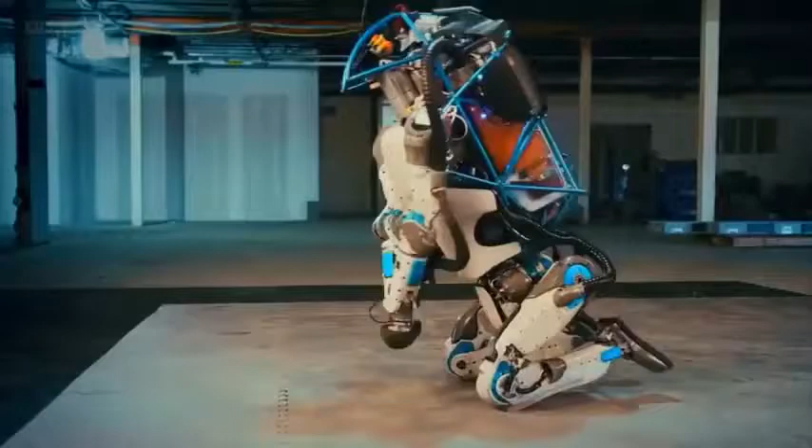We are witnessing the birth of a robot. Believe it or not, this piece of white plastic will become a robot's arm. In labs across the world, we are creating advanced robots like this. They are developing so rapidly. It's like the arrival of a new species.

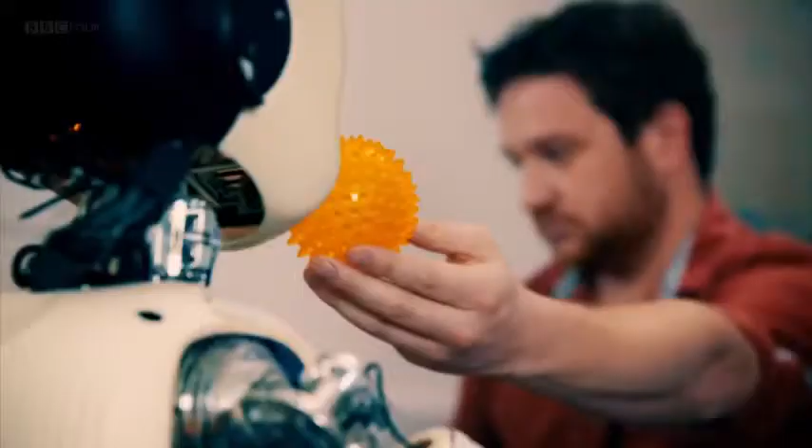What has taken humans millennia, robots have achieved in just decades. They look like us. My name is Erica. They move like us. And now, they're beginning to think like us. I like to learn. This is a ball.

Brilliant. Oh, he's looking as well. I'm Dr. Ben Garrett, an evolutionary biologist. More used to studying humans and animals, I'm genuinely concerned by how quickly these machines are evolving.

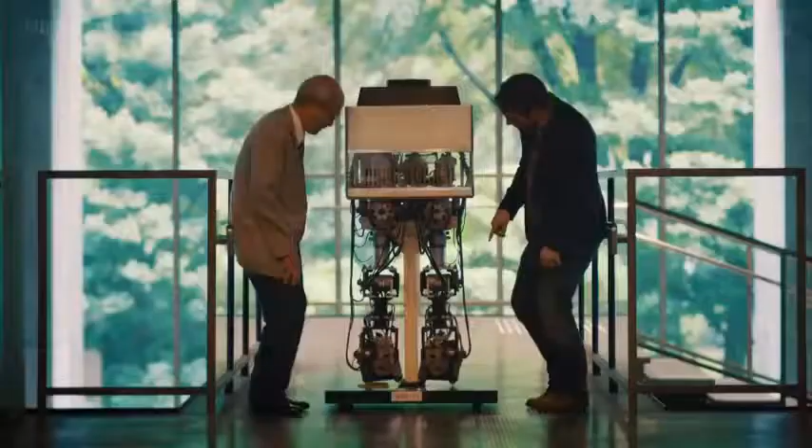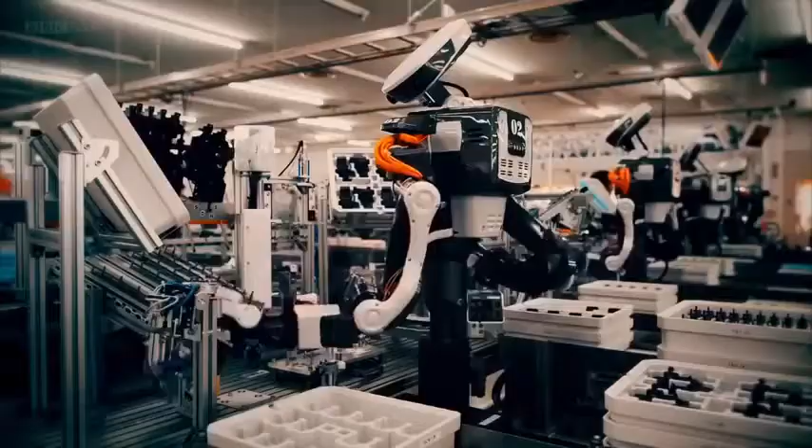Do you think I could be considered human? No. I'm Professor Danielle George. As an electronics engineer, I spend a lot of my working life with robots. I think their rapid development provides an incredible opportunity for us all. There are literally robots as far as the eye can see, and I love it.

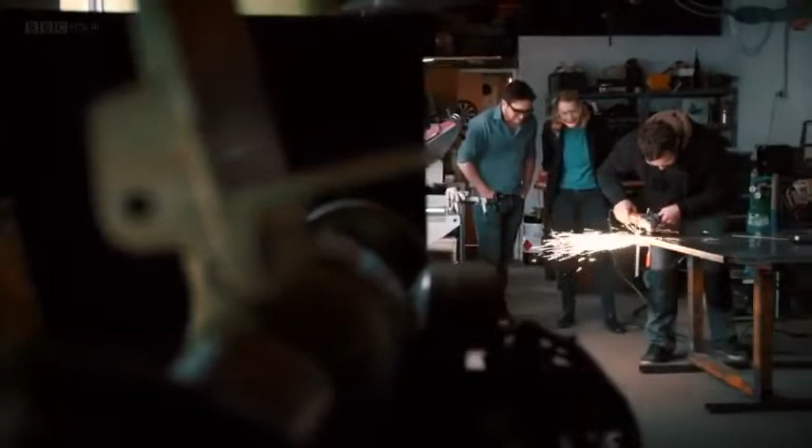Robots are changing our world. In this program, we will investigate why we are obsessed with recreating ourselves. It's very bizarre seeing you both side by side. Whether robots really will take our jobs, and if their rapid development will make them outperform humans. You don't see spinning wheels in Mother Nature.

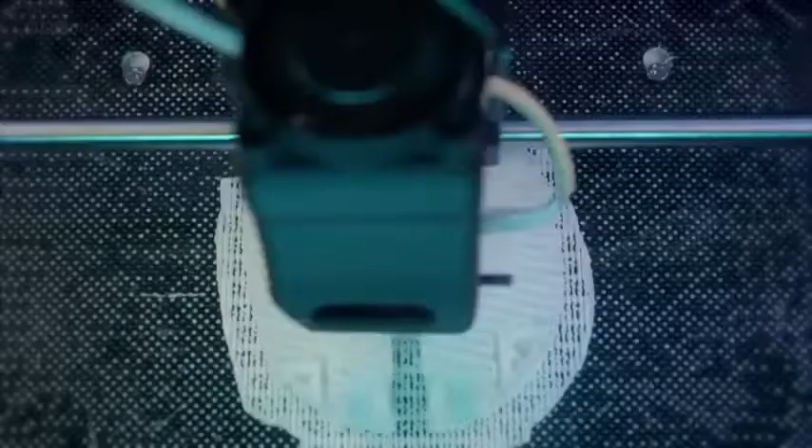We already share our planet with 9 million robots. They're multiplying rapidly, whether we like it or not. We've come to a laboratory in southern France, where one of the latest members of this new species is about

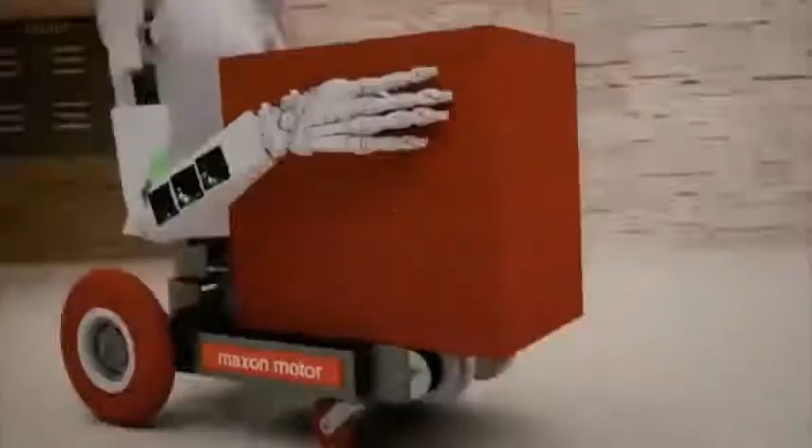to come to life. Looks great. Even the neck looks so detailed. Well, it's like vertebrae, isn't it? For me, every technological breakthrough, every new robot is a step forward. I think that would be great. I'd love one in my home.

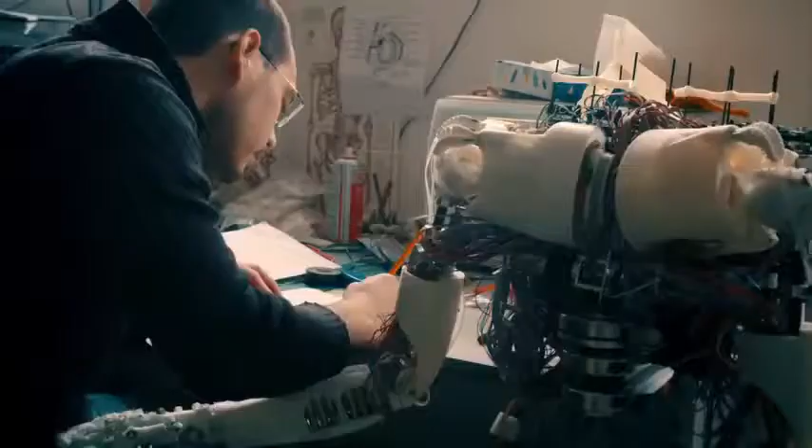Where's it going to live when it's not doing the washing? Do I just put it in a cupboard next to the Hoover? Is it always listening to me? That's interesting that you'd see it as a person and not like your Hoover. It looks like a person, that's why.

This is going to sleep in the garden. Seriously, if I have one of these in my house, it's in the garden.

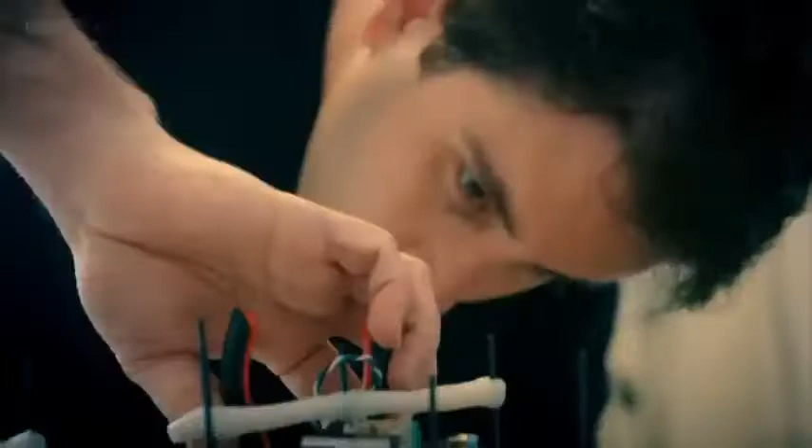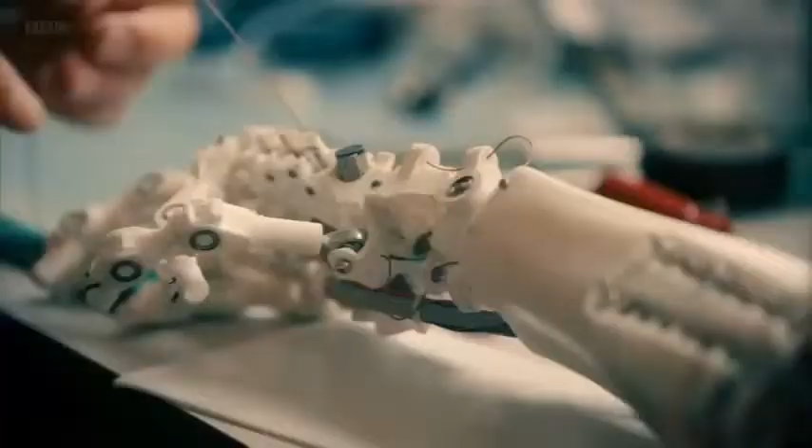I'm very happy studying animal skeletons, but I find this robot quite unnerving. If you hold the hand, it is just like you. It's got the same digits, the thumb moves the same way, you've got the ligaments, the tendons, the muscles.

As an evolutionary biologist, what concerns me is that the impact of robots will be so monumental, they could threaten humanity. We've evolved over hundreds of thousands, if not millions of years. These things are just bulldozing their way through, and at what point will that stop? The faster we can go with this, the better, and I'm all for it. They're like an invasive species. I mean, I don't know why I'm holding its hand still either.

To discover how robots really will affect our future, we're going to consider them from a biological perspective. We will investigate the evolution of robots as if they really are an emerging species. We'll try to track down the earliest robot specimens and meet their modern-day descendants to reveal where the species is heading and what that means for us all.

I find it really disturbing that so many robots have a human-like form. To confront my fears, I've come to Japan, to find out why we create robots in our own image. I'm on my way to meet one that is the pinnacle of human form.

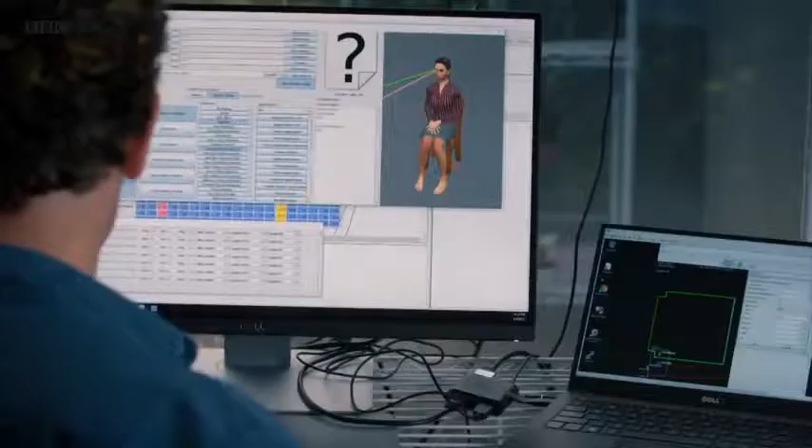What about you, Ben? What do you like to do for fun? More than that, I travel, I read, I go outside. I can't move around much, so I haven't been to many places. Do you have any favorite foods or dishes? I like pizza. Thick or thin crust? Thin. I hope you had breakfast this morning. Talking too much about food makes people hungry.

Remarkably, this is a genuine conversation. Erica reacts to what I say instantly and independently. She may have been pre-programmed to respond to keywords in my questions, but the exceptional thing is that when Erica is chatting away like this, she's gathering fresh data. With every conversation, her interactions become more sophisticated, more natural, and more human.

What is a robot? That's a hard question. I could ask you, what is a human? Haha. It's difficult to answer, isn't it? I like to think of robots as the children of humanity. And like children, we are full of potential for good or evil. I know some people are afraid of robots, but the truth is that what we become is up to you.

Do you think I could be considered human? No. Maybe someday robots will be so very human-like that whether you are a robot or a human will not matter so much. Okay. What else would you like to hear about? Well, I think for now that's it. So, thanks, Erica. Goodbye. Bye.

I'm pretty bowled over by Erica's human-like appearance, and I'm shocked by how much she hooked me into a conversation. But I'm not convinced by Professor Ishiguro's belief that Erica can be programmed to express emotions.

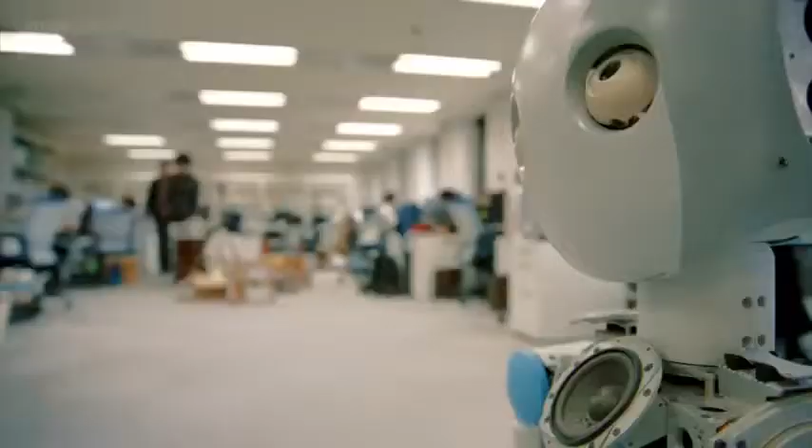Professor Ishiguro created Erica because he believes robots enhance society. Making robots like Erica appear human, friendly, and helpful allows them to build positive and purposeful relationships with people.

What is your background? Working with great apes, so chimpanzees, orangutans. For someone like me who is so wary of robots, this is a bizarre concept.

To help me understand his obsession with lifelike but artificial machines, he wants to show me another of his creations, something he has literally designed in his own image.

So this is my copy. This is the Geminoid. And how do you think? If I remove my glasses, looks similar, right? Similar. It's bizarre. So you really do. He's a little bit old, we made this one around 2009, so that means 8 years old or something. Okay, he's looking good for 8 years old. Yeah, well, I say he, you.

It's very bizarre seeing you both side by side. For me, it's a little bit unsettling seeing you look so similar and knowing that one of you is a robot. Do you feel an affinity with him? Do you feel a connection with him? No, he is a kind of twin brother. Okay, just twin brothers, right?

One of you is going to age and one of you is not. What will you do when you look different to him? Honestly speaking, I'm doing some light plastic surgery, and they always make my face younger. So you've had plastic surgeries that you look... No, not a serious one, right? Just simple injections, but it works well.

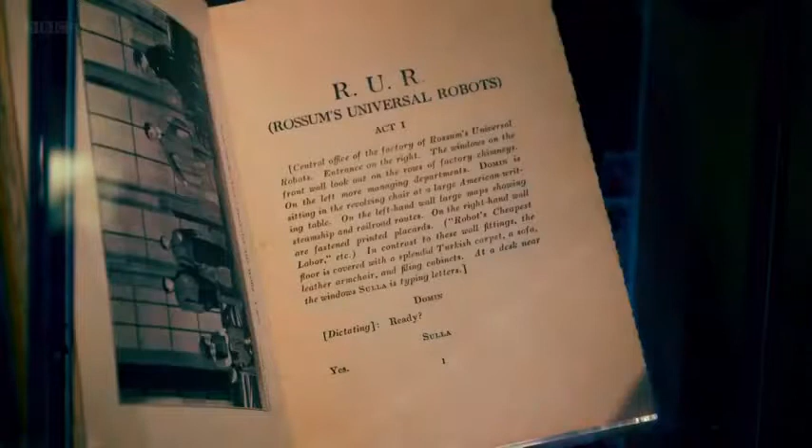You're saying, actually, I think we're this, I think I'm a machine, or whatever. And actually, robots are really like mirrors, they make you think about yourself.

In the 1920s, that mirror reflected an image of a fearsome robot, already deeply embedded in our cultural imagination by a dark, dystopian play. The word robot comes from Karel Čapek's play, Rossum's Universal Robots, 1920. In Czech, the word robot means serfdom, or drudgery, or slave.

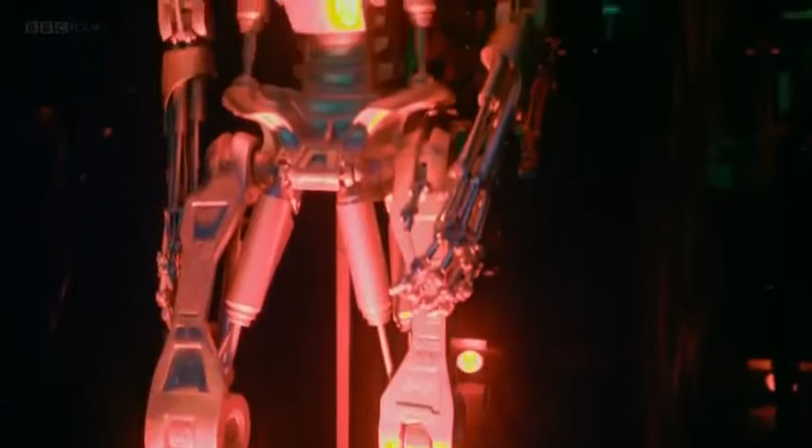It's become a familiar plot: robots lived amongst us, but eventually rebelled and exterminated the human race.

It's way ahead of its time, we're 50 years ahead of Blade Runner and Westworld and all those sorts of films. Robots are a very useful baddie for filmmakers, that put people off balance, and filmmakers exploited that. Things like the Terminator, it had to be in here.

It looks like it's got a bit of a broken nose. It's a bit of a bruiser, isn't it? There's a great package of nastiness stuck in, and it just sticks in the memory because of that.

But there's always some slight niggling doubt that they are going to destroy us all and take over the world and that sort of thing.

And what people worry about more than anything else is that they will take our jobs.

This is Mansfield, a Rust Belt backwater in Ohio.

I'm here to track down one of the first robots that could move. Movement is what gives robots their power and sowed the seed for them to compete for our jobs.

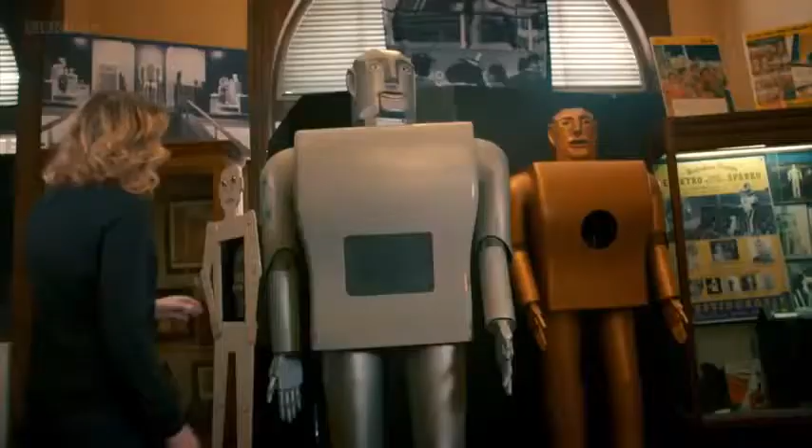It was electric power that enabled Electro to move and perform tricks. Count on your right hand: 1, 2, 3, 4, 5. Well, that's absolutely correct.

I want to find out more about how exactly Electro moved. To do that, I've got to meet him in person.

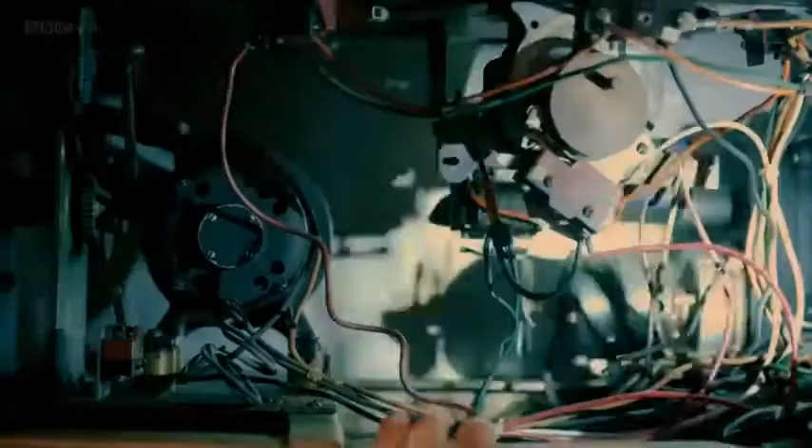Today, at Mansfield's Memorial Museum, Electro is still on show. So, this is Electro. He is big robot.

You look at the size of me, I'm pretty tall. But not scary, not scary at all, actually.

You can see the fingers, they've obviously got springs in here. I'm gonna go around the back and have a look. Wow, okay, so you can see what's going on a bit more here. This is great, 3 motors.

As an engineer, I love rooting around motors and wires to figure out what makes robots tick. You can see these great levers and cogs that would obviously hold the tendons from the fingers up the arms into the shoulder.

When the arm would move up, the lever would move down onto this limit switch. This limit switch broke the flow of electricity to the arm's motor, so the switch would then say, OK, you've reached your limit, now you can go back down again.

But what's still unclear is how Electro was controlled during his stage performances. To get to the bottom of this, I'm meeting a man who knows the robot's innermost secrets.

Frank Ruth is 84 years old. In the early 1940s, he single-handedly took Electro on a tour across the United States.

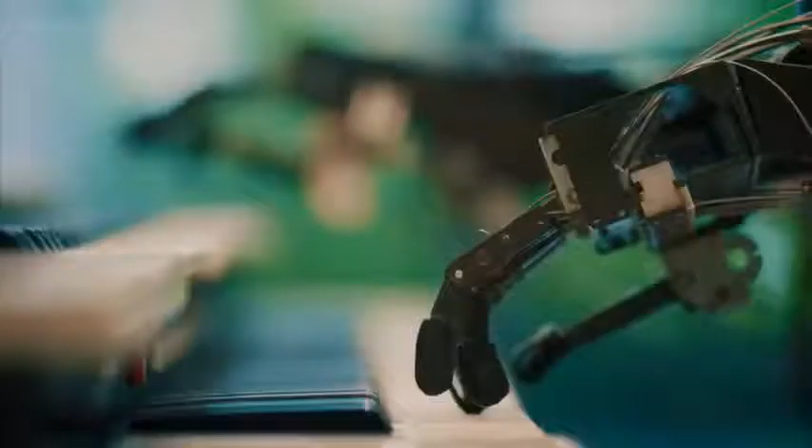To create robots with flexible, dexterous hands, robot makers turned away from industry to something that required more artistry: music.

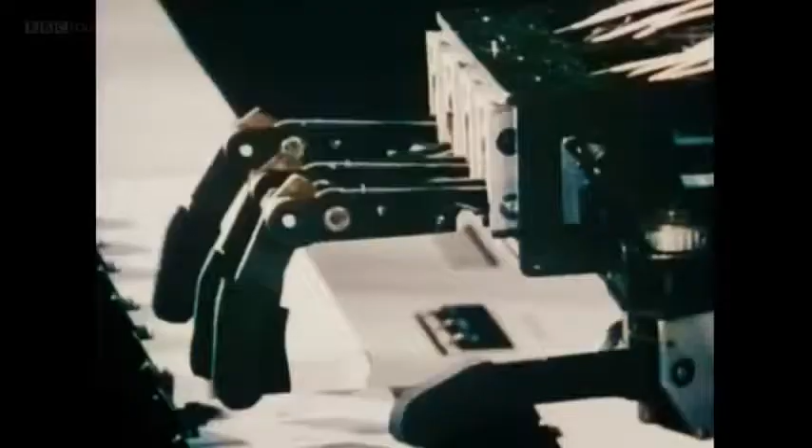This is Waseda University's Humanoid Robotics Institute in Tokyo. I've come here to meet the next key robot in the evolution of movement.

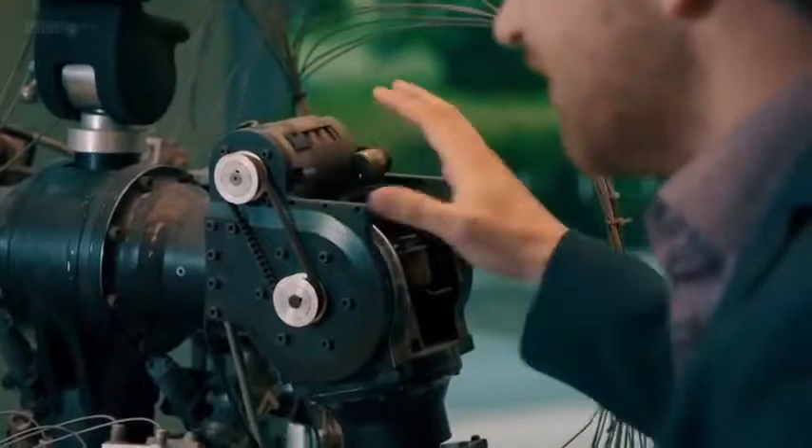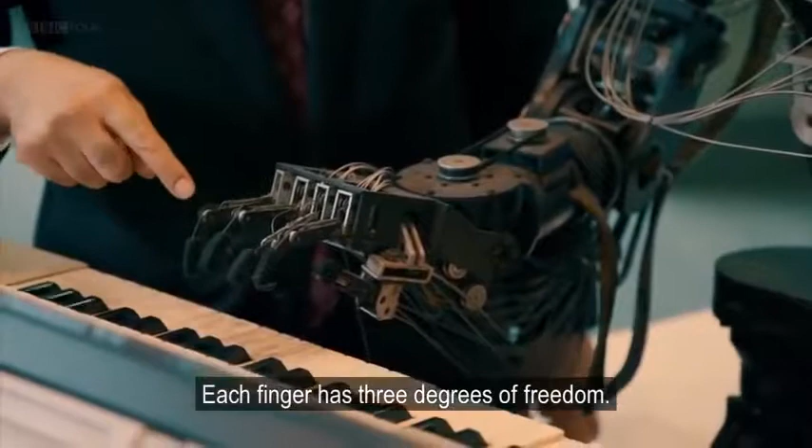It was a keyboard player: Wabot 2. Dr. Sugano was part of the Waseda team that built Wabot 2 in 1984.

Sugano-san, this is a beautiful robot. It's almost as though we have the tendons and the muscles and the arm. It's very similar to a human arm here - this big rotation up in the shoulder, we call it a hinge joint in the elbow, and then these very dexterous fingers. Each finger has 3 degrees of freedom.

3, 3, 3, 3, and 4, so there's 16 degrees of freedom in total. So Wabot 2 has actually 50 degrees of freedom in total.

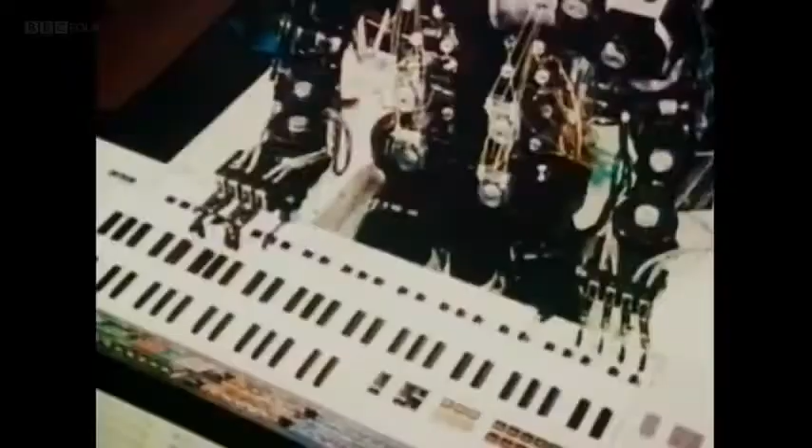To control Wabot 2's impressive 50 degrees of freedom, Dr. Sugano took advantage of one of the breakthrough technologies of the early 1980s: the microcomputer. We decided to introduce 16-bit microcomputers, meaning we could implement more intelligence. Then, finally, we could realize the piano playing.

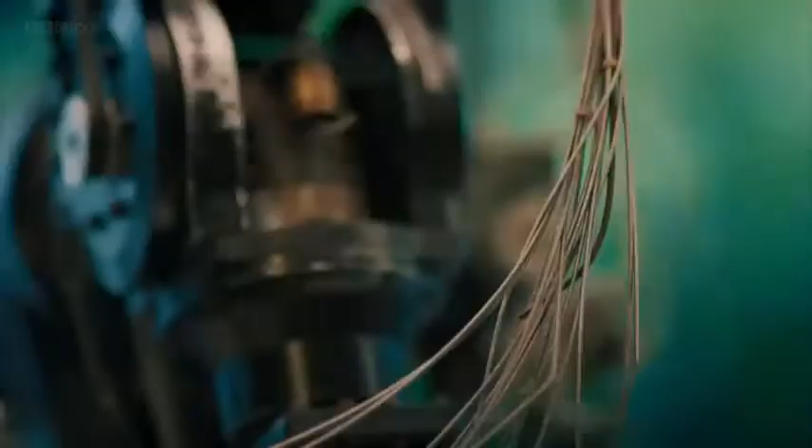Now he's moving very, very quickly. You can see there are very human-like fingers. Wabot 2's microcomputers are a highly sophisticated version of Elektro's control unit that tell Wabot 2 exactly how to move. The microcomputers mimicked the human nervous system and transmitted signals along Wabot 2's electrical cables to its fingers.

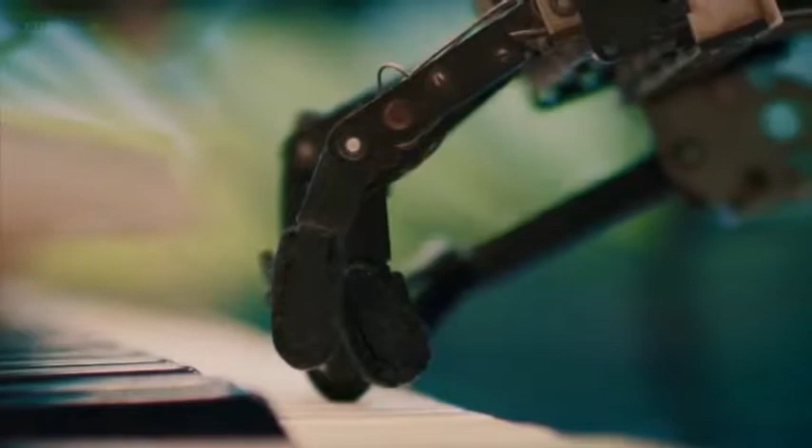How fast were the fingers when he was functioning? It's possible to strike a key 20 times per second. 20 times a second? It is impossible, that's much faster than the human. Human professional pianists use 2 fingers to strike the same key about 16 times per second or something.

Amazingly, Wabot 2's fingers outperformed the fastest human players. How was it capable of doing that? What was going on inside?

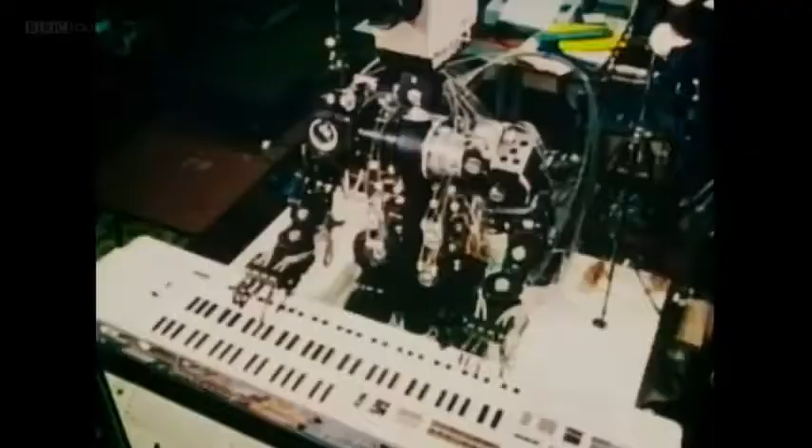Wabot 2 may have played his final encore, but for me, his legacy endures. This Japanese robot enhanced people's lives and showcased the potential for robots to take on more sophisticated tasks.

The human hand is so incredibly complex that so far, no one has been able to mass produce a robotic version of it. But this hasn't stopped robot hands from developing, and it's this that gives them the potential to do many of the jobs that we do.

Robots now follow their own evolutionary path rather than mimicking ours. They're developing hands unique to them.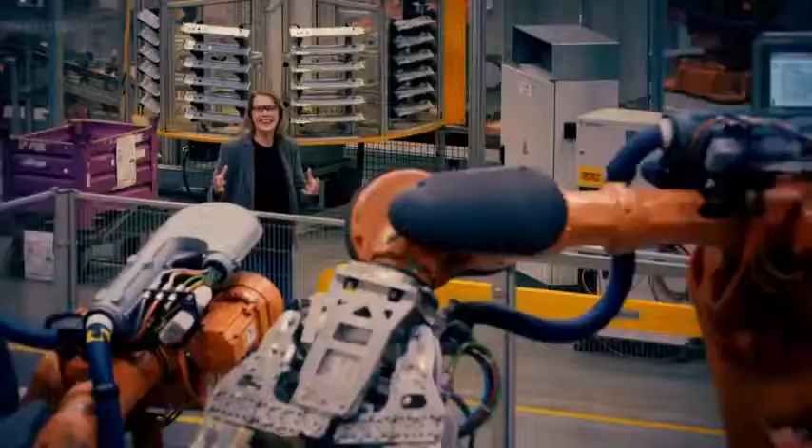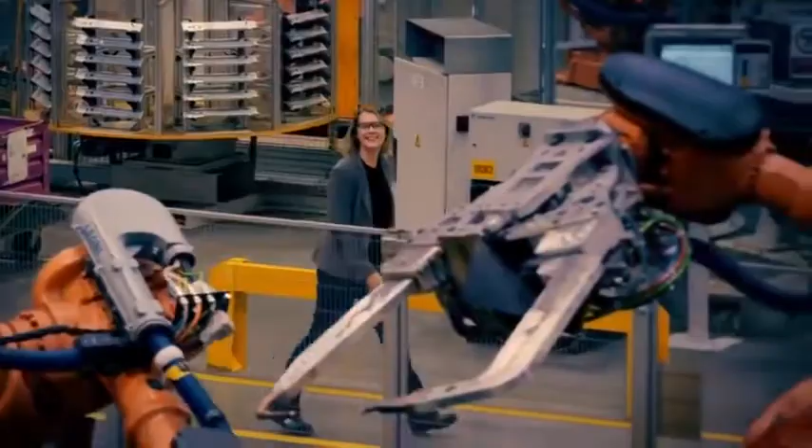At Mini's car plant on the outskirts of Oxford, this is a land of robots. More than 900 of them build the bodies of 1,000 new cars every single day, with barely a human in sight.

I feel like I'm in a robotic Jurassic Park. These robots feel strong and powerful and a little bit menacing. This new species have found their habitat and they're thriving. I wonder if Ben would like it.

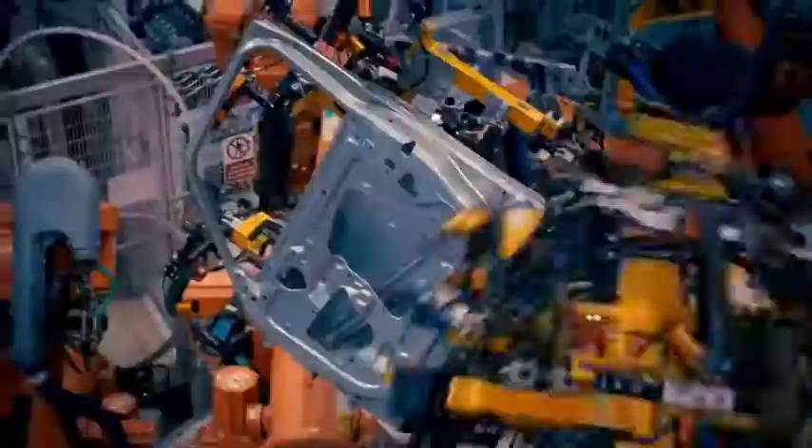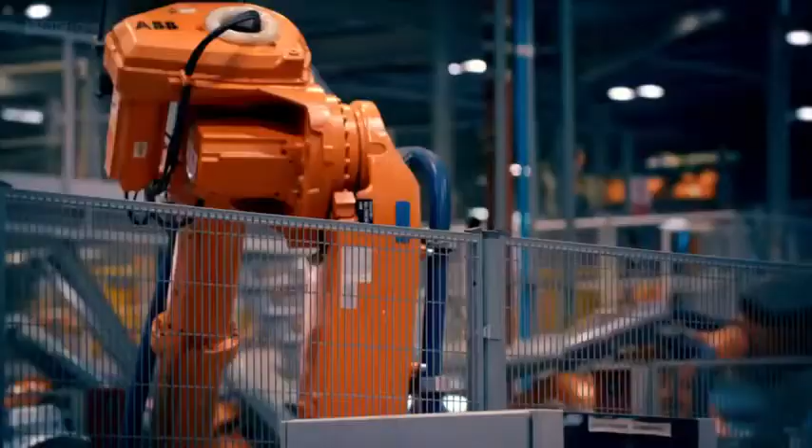Robots are behind bars. The mutant hands of these robot dinosaurs are claws. They lift car bodies weighing up to 400 kilograms, and with up to 6,000 spot welds on a car, they're kept busy. With their claws doing the hard graft, robot arms have replaced humans on the factory floor.

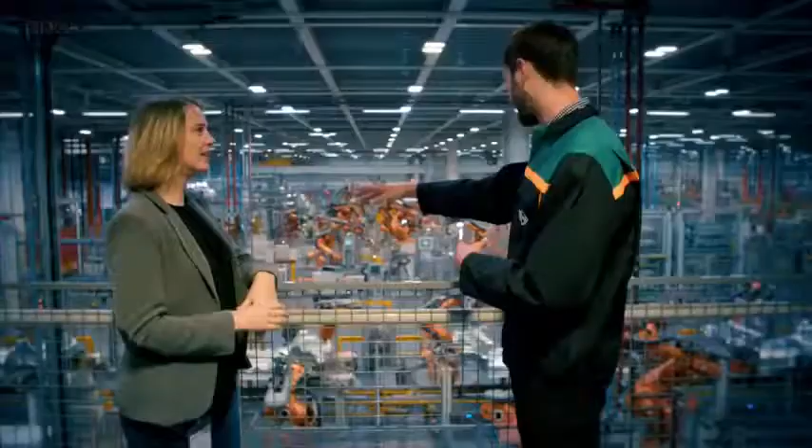I'm captivated by these incredible machines. They work in perfect harmony, robot hand in robot hand. This is so frustrating. As an engineer, I want to get in here. I want to see how these robots work, but I can't. You know, when I met Elektro, I was able to hold Elektro's hand, but I can't get anywhere near these robots.

To understand why these robots are thriving here, I need to speak to a human. Alex McKenzie is a quality specialist at the plant. So Alex, tell me what's going on here in this part of the production plant. What are these robots doing?

The line immediately in front of us here is a spot welding line. The shape of the underbody of each of the mini vehicles is set a few stations further behind, and then the spot welding activity joins all the panels together.

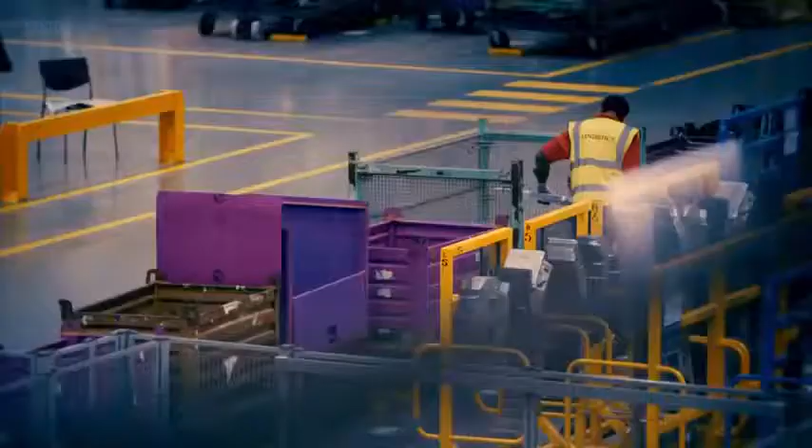So what's the benefit of having robots here over humans? Robots are predictable. They're not perfect, but they're predictable. They perform pre-programmed repetitive tasks much more reliably than humans.

So people watching this might think that these robots are taking human jobs. Is that the case? It's very densely populated by robots, but you'll often see people milling around. I can see a guy in the background there scooting along. In fact, around 650 humans work alongside the robots in the welding area alone.

You know, it's a change in skill set. Previous manufacturing methods have been heavily dependent upon manual hand skills. Now it's more to do with the automation. It's all done on the computer. It's programming work, it's observation, it's setting up sensors, that kind of thing.

With powerful, predictable robot arms and highly skilled people managing them, the manufacturers believe they can produce better quality, cheaper cars. It's a pattern repeated in factories all over the world. The advancement in technology has led to efficiencies in cost, which allow you to attain those efficiencies in quality as well for a lower price. Yeah, it's a good thing for everyone.

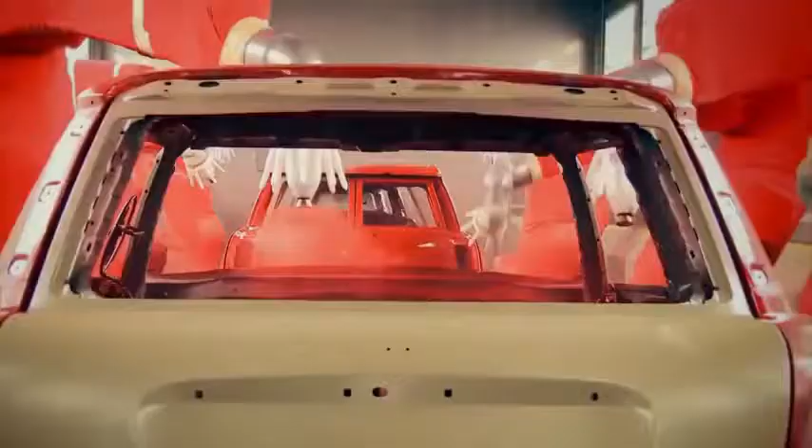The whole place just oozes energy and industry and production. There are literally robots as far as the eye can see in every direction here. And I love it.

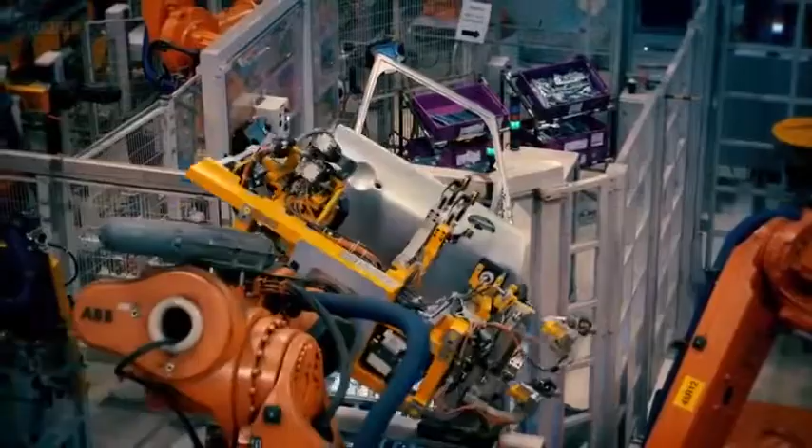With their claws, stumps, and one-fingered hands, robots have gone through their own version of natural selection. This mutation away from the human form has transformed our job market. Worldwide, factories are filled with over 3 million industrial robots. We've built a robot world and kept them safely contained in cages for now. Some experts predict that by 2030, robots could have taken up to 30% of our jobs. But we've sort of been here before. Many people were concerned about the pace of change during the Industrial Revolution, yet, in general, it led to wealth and prosperity. I think we should embrace the robot revolution, not fear it.

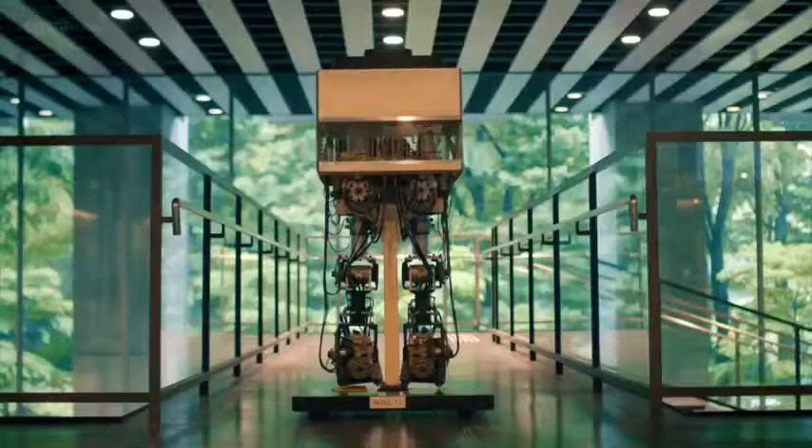But for robots, walking on 2 legs is not straightforward. That's because it's the most difficult movement they make. At Waseda University, I want to find out how engineers pioneered a groundbreaking transformation in robotic walking. Their first challenge was to build legs that were flexible enough and powerful enough to walk independently, like a human.

This is WHL-11. Built in 1985, it's one of the first autonomous walking robots. Dr. Fuji helped create a robot that mirrors our biological anatomy with mechanical anatomy.

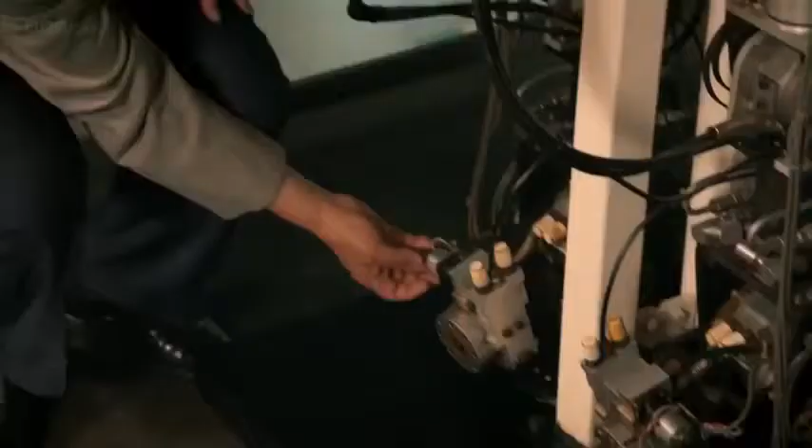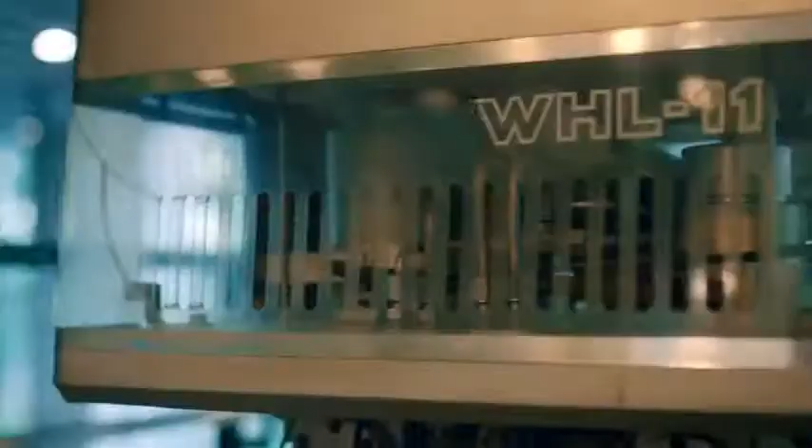Fuji-san, this robot is one of the first that was bipedal, so walking on 2 legs, yeah? Yes. So he's got the feet right down the bottom, and it's got the knees in the middle, like our knees, I guess. And you've got this big area of hips up here. Yes, we can see actuators. WHL-11's legs are just under a metre tall, the same size as our human legs. We control the rotation of our joints with muscles. In robots, this is done by actuators. I guess these are controlling the movement. Can get big power from here. Yeah.

To walk independently, Dr. Fuji helped engineer a small, lightweight hydraulic motor that could be mounted on WHL-11's waist. In the mid-1980s, this was cutting-edge technology. A very small oil tank here, and a very small motor here.

WHL-11 was capable of just 5 steps a minute. When humans first became bipedal, like WHL-11, we probably had a slow, lumbering gait too. As our pelvis evolved, we could shift our center of gravity. Our walking became fast and smooth.

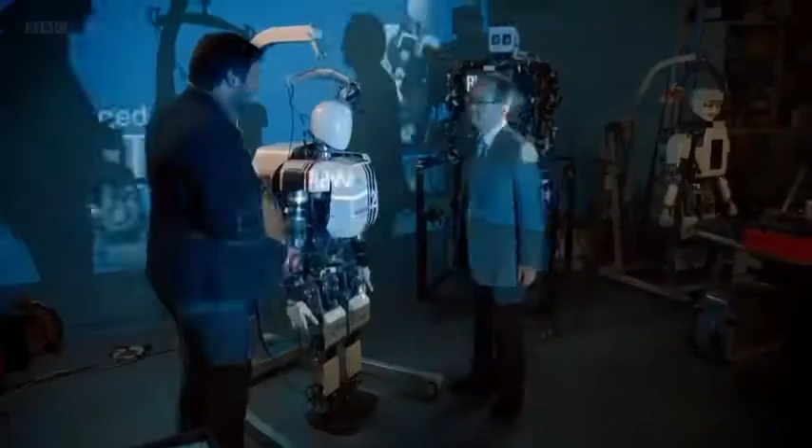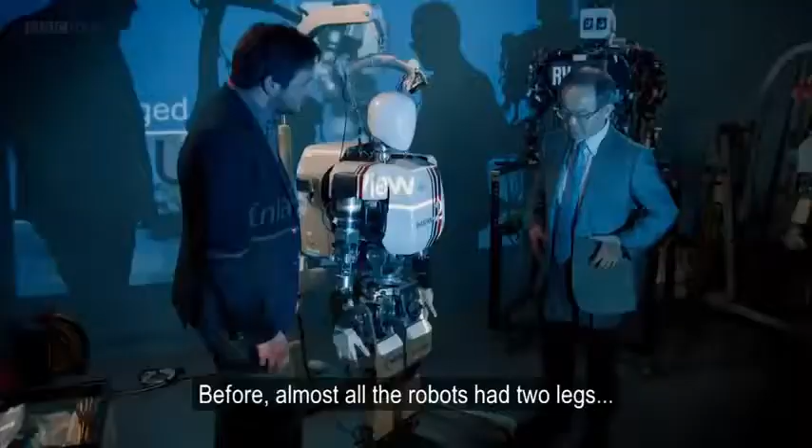Just around the corner from WHL-11 is a robot that solved this next evolutionary hurdle. Built just 20 years after WHL-11, this is Wabian 2. Wabian 2 is one of the first robots with a human-like pelvis. This gives it the ability to walk faster and more fluidly. It was invented by Professor Atsuo Takanishi.

Takanishi-san, when humans walk around, we have very fluid, dynamic movement. Our knees bend, our ankles twist, our hips rotate. We've got a wonderful gait. You decided to take this to the next step with this robot, didn't you? Before, almost all the robots had 2 legs directly connected to the trunk. In that case, a robot always bends the knee like this. So the first thing we did was this.

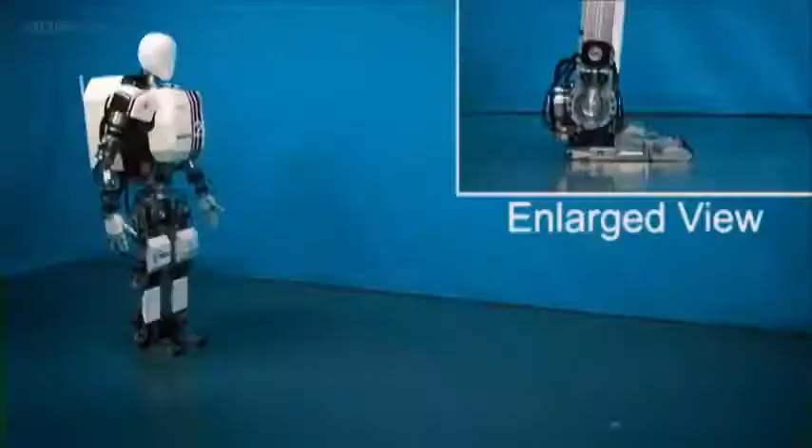This part is called the pelvis. Like, just like ours? Yes. So while walking, the pelvis also moves. Because of this movement, the robot can fully extend the knee, like humans.

Wabian 2 mirrors our human gait by shifting its center of gravity. Fully extending the knees liberates the feet and propels the robot's center of gravity forwards. As it shifts forwards, one foot lands, and then the other foot takes off, just like we do.

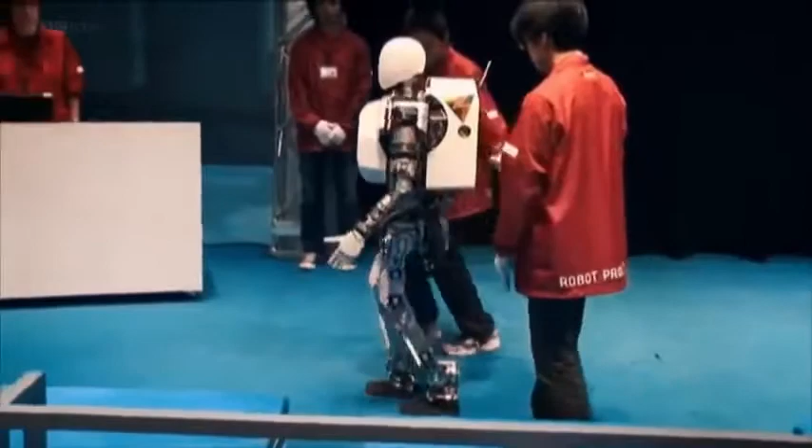It's wonderful that we can look at humans and see this clear evolution from apes, like chimpanzees, to humans, this change, and you've got the same evolution with your robot here, haven't you? Yes. It was millions of years before humans learnt to walk on 2 legs.

By following our evolutionary path, these pioneering robots have mastered bipedal locomotion in just decades. But now, on the outskirts of Boston, a world-renowned robot maker is trying to take this emerging species in a completely different direction by liberating machines from the constraints of human form.

Robot walking has diverged from our evolutionary path and taken on a life of its own. I'm on my way to meet one of the most advanced moving robots on the planet. More than just a master of moving, it's the ultimate combination of mobility, agility, dexterity, and speed. And the woods near Boston are its playground.

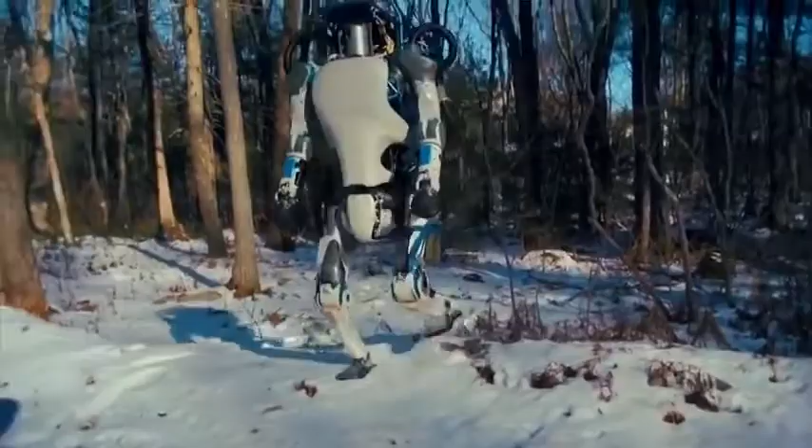This is Atlas. He's out for a stroll. The robot was built to tackle the toughest terrain in the toughest conditions.

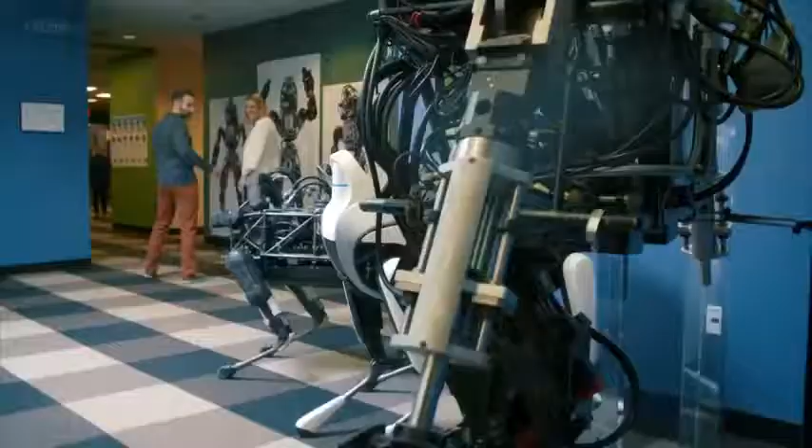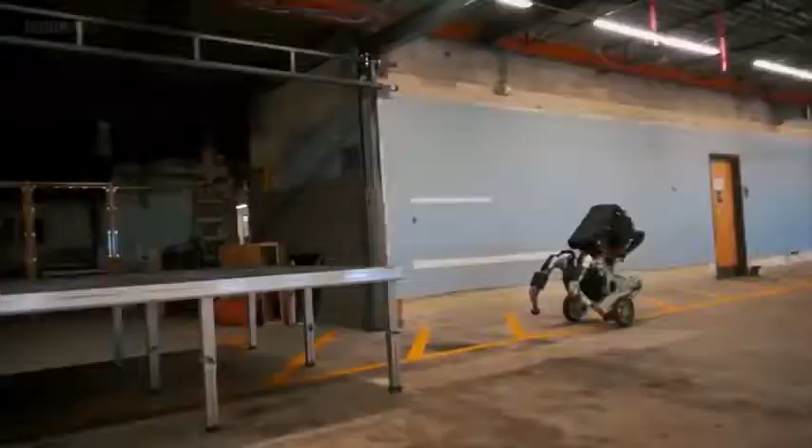This is the home of Boston Dynamics. They get thousands of media requests, so being able to film here is a real coup. Kevin, hi, lovely to meet you. You as well. Kevin Blankespoor is the Vice President of Controls. If you want to come in the lab, I'll show you the latest and greatest. Brilliant, okay, thank you.

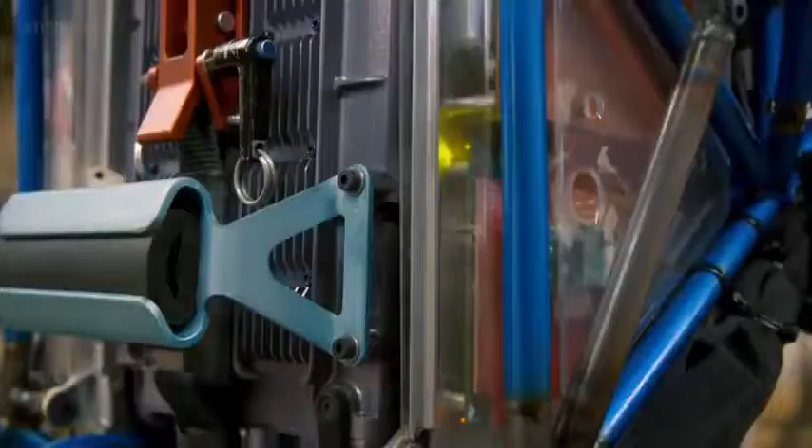The robots Kevin has helped mastermind push the frontier of robotic movement. The really good stuff's back here. Excellent. Their videos get millions of hits online. For some, their high-tech creations are terrifying. But for me, they're awe-inspiring.

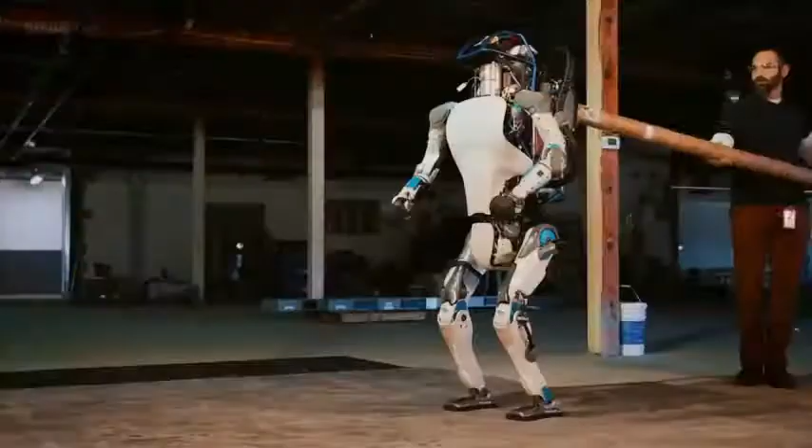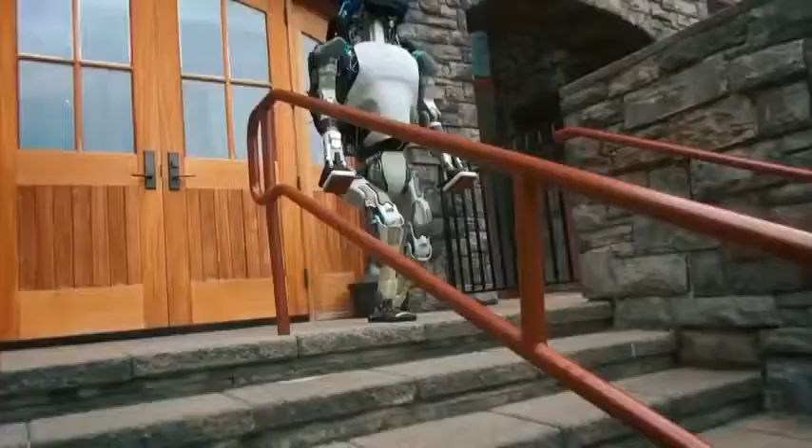This is Atlas, our latest and greatest humanoid robot. That's great. This is probably the only humanoid robot you're going to see walking around outside in the snow, in the mud, just in the real world. It's battery powered. That battery basically spins an electric motor that turns a hydraulic pump, providing hydraulic fluid to all the actuators. We're a big fan of that because it's really strong and really fast. They're also really robust. We don't take it easy on the robots.

It's about 1.5 meters tall, weighs about 90 kilograms. So I'm surprised at its height. I mean, it's pretty small, actually. It's like human height, isn't it? Yeah.

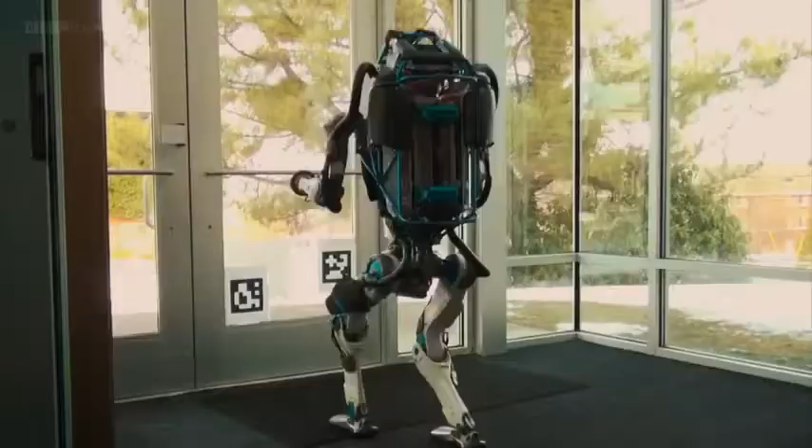To move around the human world, Atlas walks in a similar way to us. People walk dynamically, so we don't try to keep our center of mass over our foot. We're actually kind of always falling. It's a controlled fall, but we have our foot down here and our center of mass will be way out on the edge, and we're taking these long strides and naturally letting our center of mass fall.

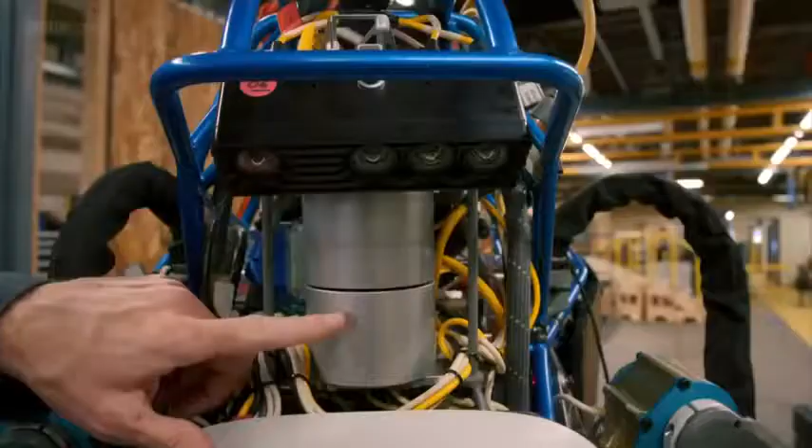To cope with the obstacles and different terrain in our human environment, Atlas's balance is guided by dozens of onboard sensors. What's the rotating head here? Yeah, so this is the perception system. This is basically its version of how it sees the world, the way a person would.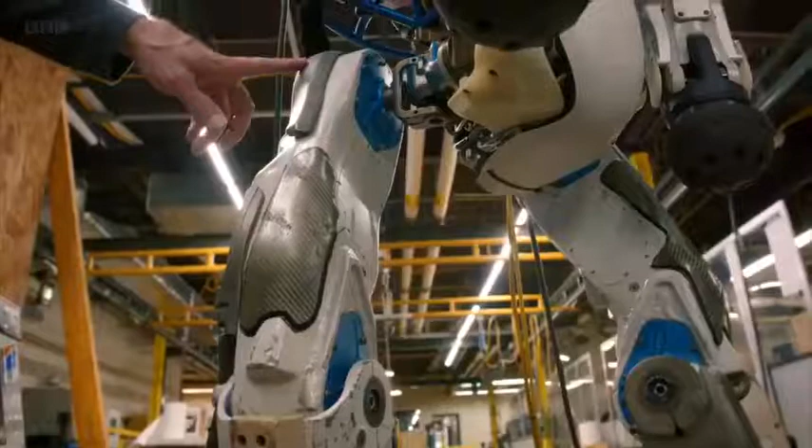There's two main sensors. There's this sensor, which is stereo vision. The stereo vision looks out several meters, and that helps it find good footholds, avoid obstacles, things like that. And this LiDAR is basically a laser rangefinder. It's got 32 laser rangefinders that spin around and give you about 1 million points per second of where the world is around it. This one looks further out, and this will help you find walls and other obstacles so you can navigate through them.

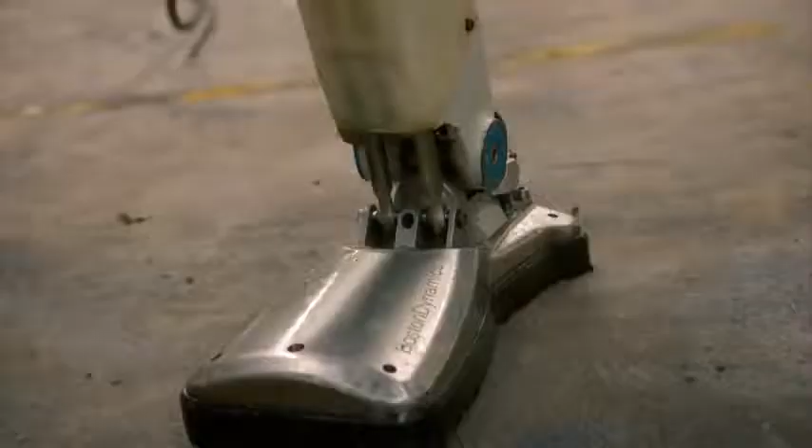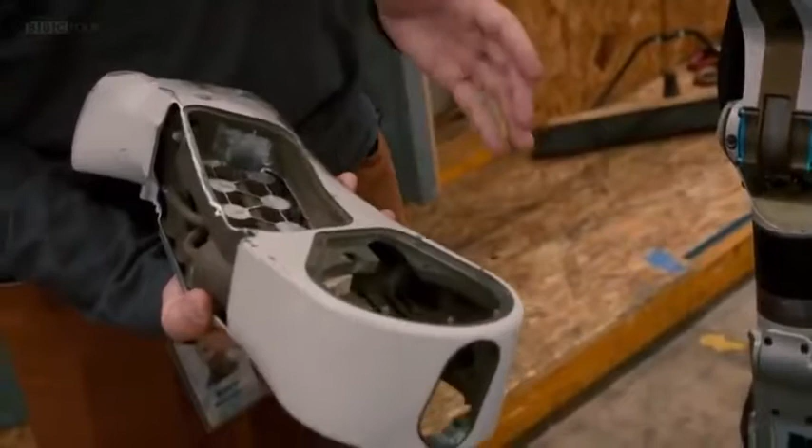Each one of these joints actually has a position sensor and a force sensor, especially the ones down in the legs. Plus we've got a gyroscope in the pelvis. With all those sensors, we're kind of always sensing how we're falling. That's the key part, right? You actually have to know how fast am I going, where am I going, to figure out where to put down that next foot. So these sensors help us find basically no-go regions, we call them no-step regions, obstacles, so that I can still maintain my balance even as I'm working my way through tougher terrain, like up a staircase or through a hallway.

So just like a human, then? It's getting there. Yeah, that's the goal.

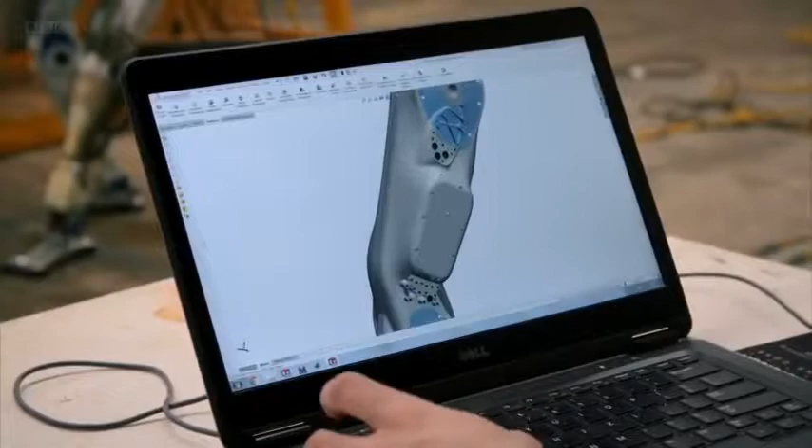Incredible. To enable Atlas to walk like humans, Kevin and the team focused on the robot's strength-to-weight ratio. If you look at this upper leg here, I can grab a version of this that's cut open so you can see the inside. We totally redesigned the leg to use 3D printed aluminum. So what used to take dozens of pieces, we can now print out of one piece of aluminum. That's allowed us to make a leg that's about the same strength as the big robots, but at about half the weight. Wow, it is actually really light.

Yeah, it's probably a similar weight to your upper leg. Really? Yeah. I'd love to see what it's like inside, you know, when it's got all of the other bits. This is Aaron Saunders, our vice president of hardware. Hi Aaron, nice to meet you. He also led the design team for the Atlas robot, so he can tell you more about the leg.

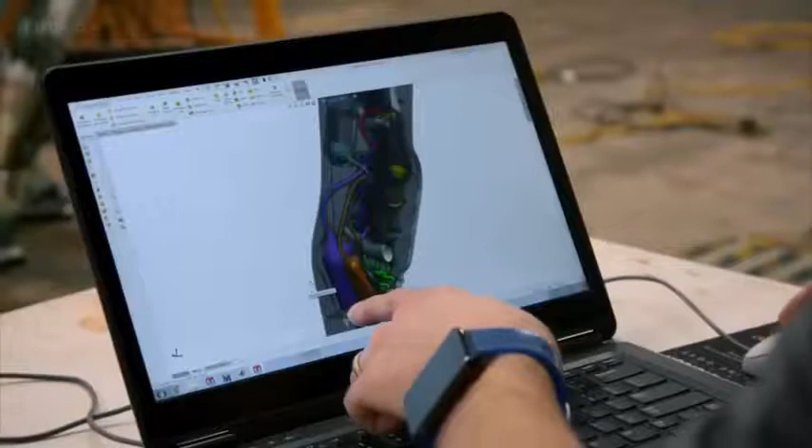One of the most important things about this leg is that buried in it are hydraulic components. Underneath this cover on the leg is a series of hydraulic valves. These hydraulic valves take the high-pressure fluid that's generated in the upper body, and they redirect it into the actuators that make the joints move. So the hydraulics is kind of like the muscles for the robot, and the valves are what controls those muscles. You can see all these colored channels here represent little veins where the fluid routes through the leg.

So that's quite like the human anatomy. There's a lot of similarities in how it looks, and the way the fluids move around the robot have a lot of overlap with how we would move fluids around our body.

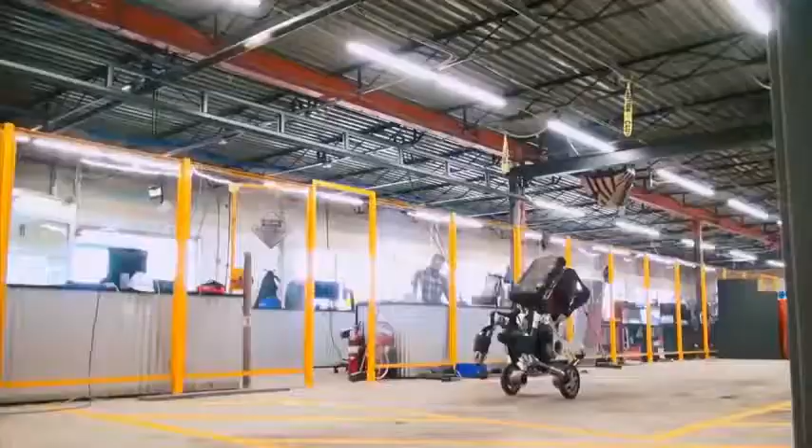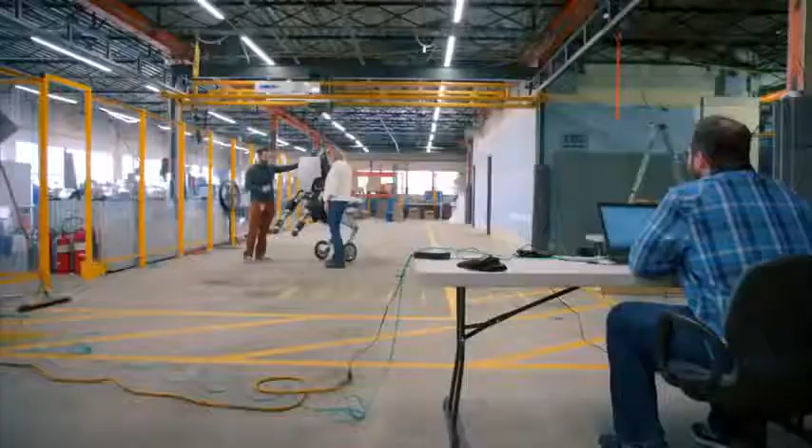Many of their robots are inspired by animals. The limitations of human form have been removed. Big Dog, their very first robot, was designed for the military, carrying a heavy payload through terrain that vehicles find impossible. And this is their latest creation, a hybrid robot with legs and wheels. Top speed 9 miles per hour, range 15 miles.

This is Atlas's cousin, Handle. Wow, you can see that there are some similarities with Atlas. This looks similar. This sort of looks similar. Yeah, it's a great observation. The upper body is actually borrowed from Atlas, so the arms and the torso are basically the same. You'll see the arms here, we actually mount them to the pelvis. And that looks kind of funny, but it allows us to do some interesting things.

So now this big torso is actually free to move back and forth and plays a real critical element for balance. If you think about when you're trying to stand still and someone gives you a little shove, if you don't want to step, you'll do a lot with your upper body to maintain balance.

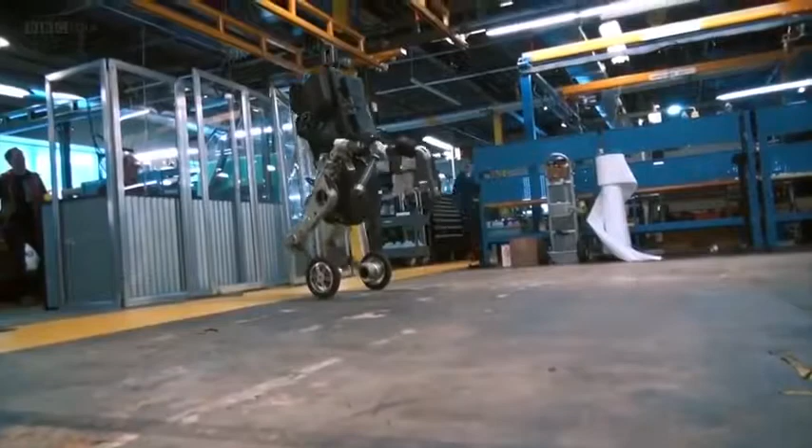And Handle does the same thing, but it can do that without its arms moving around, right? So its arms are still down in the pelvis. They could be doing manipulation while the upper body is moving around to help with balance. Great, so it still maintains its ability to do something in application whilst maintaining its balance.

Yeah, but the lower body is entirely new. We basically took off the constraints of a human form and said, well, what if we open ourselves up to a human, but plus some machine things like wheels? You don't see spinning wheels in Mother Nature, but there's no reason we couldn't add a wheel to a leg and get the best of both worlds. It's far more stable and far more efficient than the legged things we've done in the past.

So it's more stable, more efficient. And it's less complex, yeah, so that's a big advantage. Yeah, that's really good. We think it actually has a lot of potential because it has a long battery life. It's very stable, it's fast, so you can think about it working at a rapid rate.

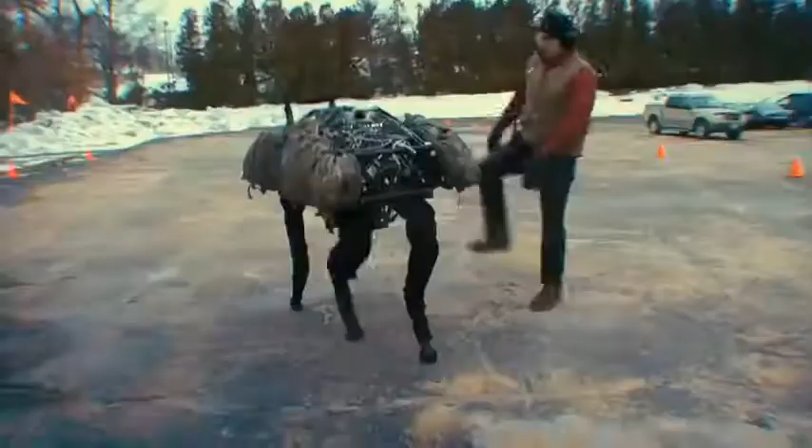We don't have a problem with pushing them to the edge to see how stable they are and how they're able to react to the real world. The real world isn't a perfect laboratory where everything goes as planned.

Do you ever feel sorry for Handle? When you give it a good push, do you feel sorry for it? It's funny, we certainly get that reaction from people sometimes. When you design these things from the ground up, all of the mechanical pieces and the software, it's a machine. So even though it can look, especially for Atlas or Spot, like a person or an animal, there's no emotions here. It's all robotics, it's all hardware. And I certainly don't feel bad if I slap my toaster around a little bit either, so. Yeah, give your washing machine door a good shove. Yeah, that's right. I don't have to go confess after that.

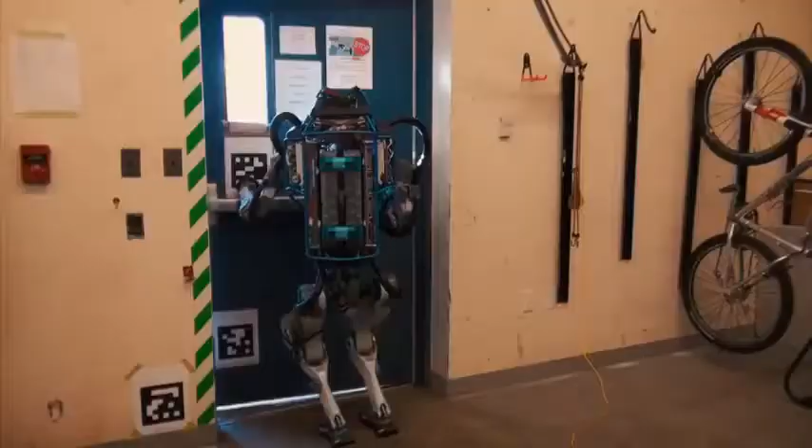I have seen some amazing machines here. Two-legged humanoid robots, four-legged robots that look like animals. Their latest incarnation combines biology with technology, mixing and matching animals, humans, our own inventions, the wheel. This may seem unnatural, but once you've seen it all, it makes complete sense.

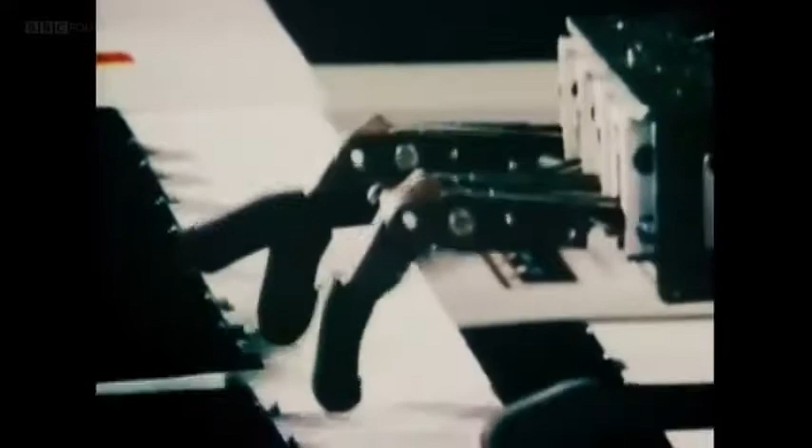We're only beginning to understand the potential of this emerging species.

Building robots that mimic humans continues to spark the imagination. But now, robots have adaptations that follow a very different evolutionary track, with mutant hands and hybrid limbs.

For me, it's been a revelation to understand the origins of our relationship with robots, and even why some people really do fear them. There is no doubt they have restructured the jobs market, and this will continue. But the biggest thing has been how fast robots are developing. We need to engage in this fascinating phenomenon to make sure that we have the choice over what we want robots to do for all of us.

And for me, I'm really surprised by what I've discovered. So I've spent a little bit of time with robots now, and yes, I've seen that they're not quite as terrifying or as threatening as I maybe first thought. But that will change. In the next few years, physically at least, they'll be able to outcompete us in many of the things that we can do. But for me, the real problem isn't if they move like us or even look like us. The real issue will come if they start to think like us.

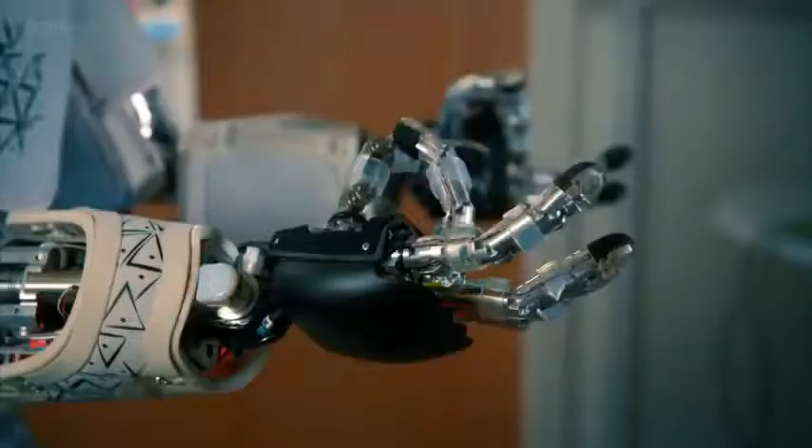Next time, we investigate what really distinguishes robots from humans. I think something's already happening. Intelligence. Please come straight for me. Can robots become our friends? Konnichiwa. This is helping break down a barrier. Can we trust them? My feet are off, my hands are off. That's good. And will they ever become conscious? Find cup. Okay, now I'm looking for a cup. And he's tracking the cup. Will intelligent robots enhance our lives? She will help set up a home for humans on Mars. Or threaten our survival? Investigate the past, present, and future of robots and their effects on our lives.